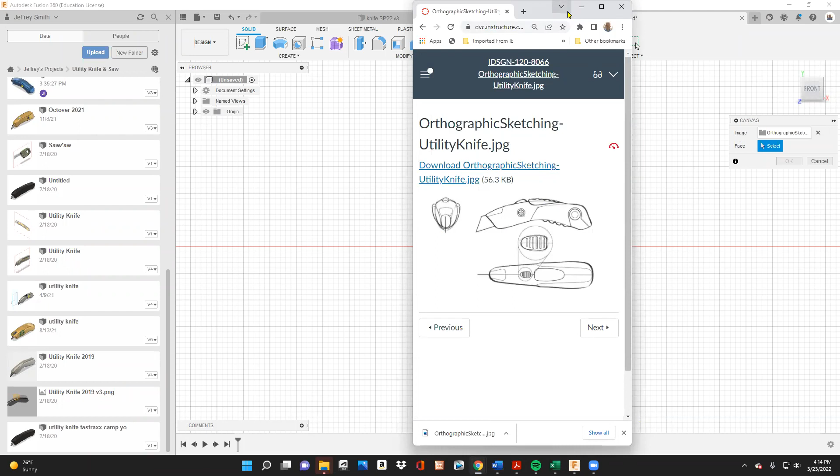Okay, so here we go. I'm going to be bringing in the sketch from Canvas, and I'm going to be bringing in my orthographic drawing. And so that is going to be this item right here. And so I've opened up Canvas, and so I am at the home menu here, at the home in 3D, and I'm gonna click on my front view.

And so what I need to do is bring in my sketch. And so the way that I do that is I go to Insert and I go to Canvas. And so insert from my computer, it's in my downloads, open. And so what it wants to know is where you're going to put this, right? And so this is going to be on this plane right here. And that's my front view. And I'll just say, for now, I'll put OK.

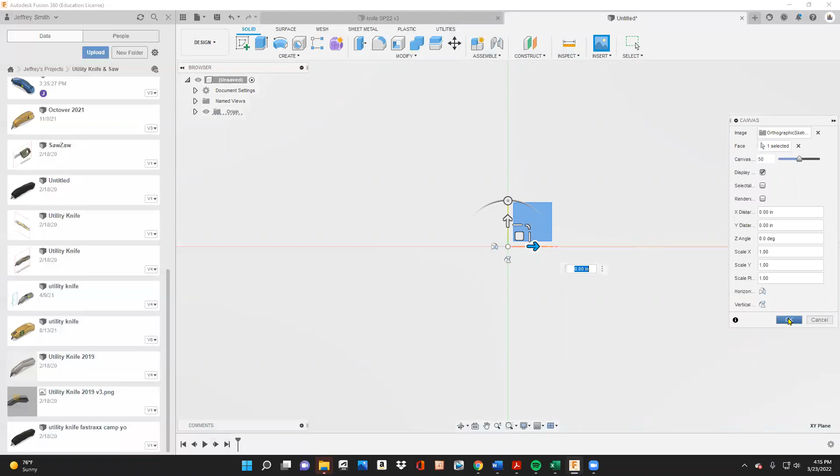All right. So let's see what happened here. Apologize for the little delay in all this. All right. So let's kind of come back to my home menu. All right. So there it is. There is my sketch right there. And I put it on the front view.

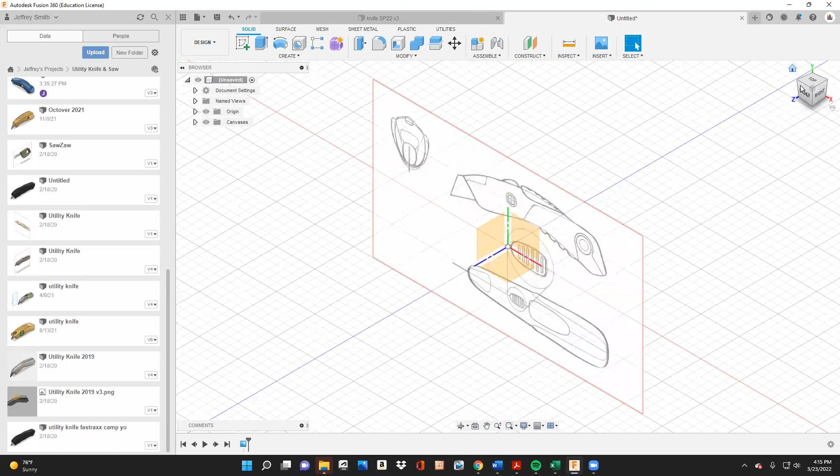So I want to model this view, and I also want to model the top view kind of all at the same time. So what's going to happen here is before I proceed much further, what I need to do is I need to scale this, right? So we have no idea the scale. In my drawing, I said, okay, I want this to be about 6 inches.

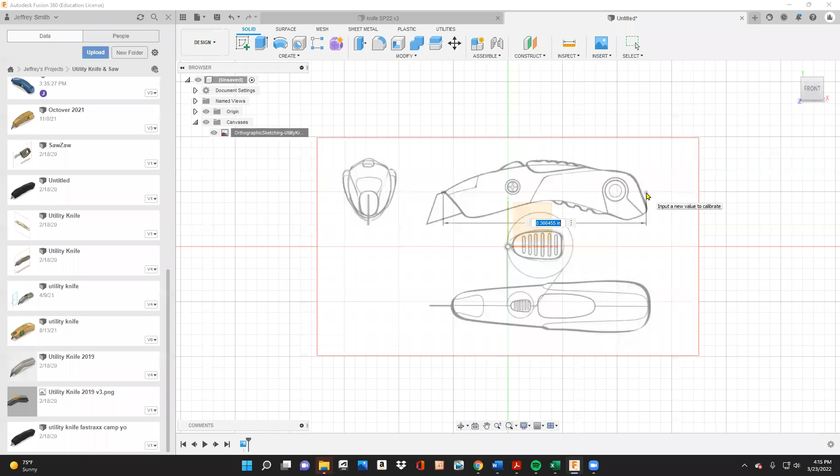So I'm going to go here to my canvas and I'm going to say calibrate. And so it's actually really easy to use. I just click on what I want the size to be. So I want that to be 6 inches. All right. So I just type in 6 and I scroll out and it's at 6 inches. Now I want to make sure that I'm in inches, and I am. If I'm not, I just click and I can make it something else.

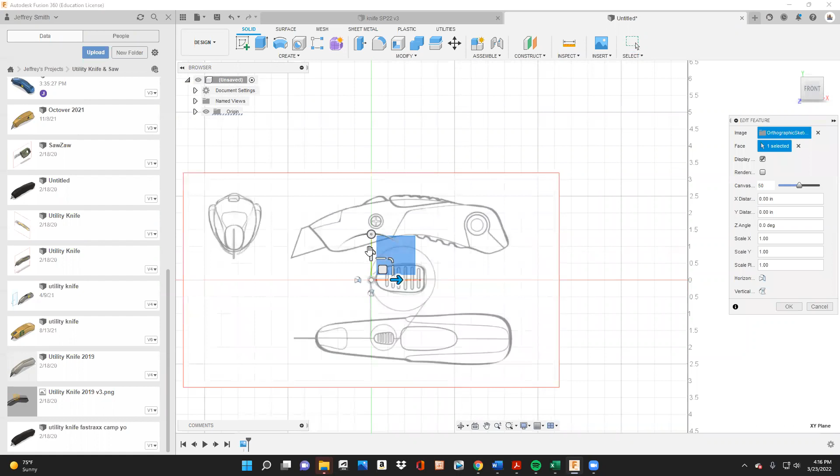And then what I'm going to do is I'm going to move this. So I'll go right click and I should just be able to move it by right clicking it. I can go edit feature and I can just move this. And I'm kind of making this my X and Y plane, and I'm just putting it there. It'll be easier to do it that way. Okay, so that's cool. All right.

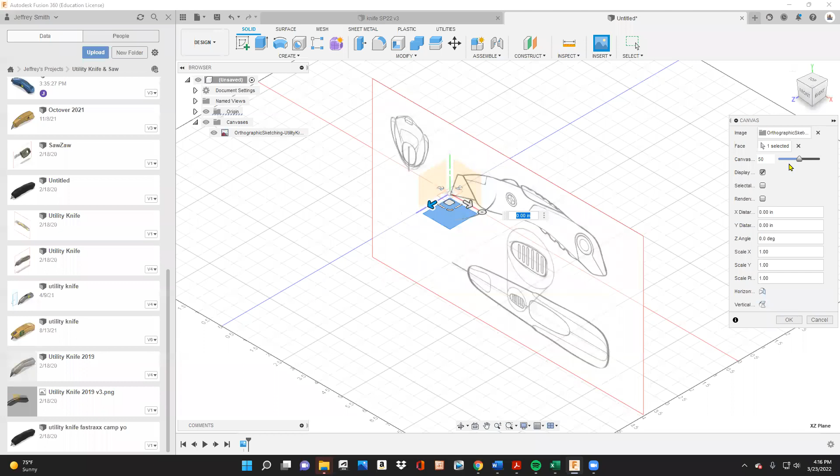Now I'm going to do the same thing for the top view. So let's go. Here's my home view, and I'll do exactly what I did before. Insert canvas, and I'll select the same object, my sketch. Okay. And this time I want to put it on my top view. So I'm going to click this, that right there. And hold on, please. Okay. And so there it is. And I'll say, okay. And I'll do the exact same thing I did before.

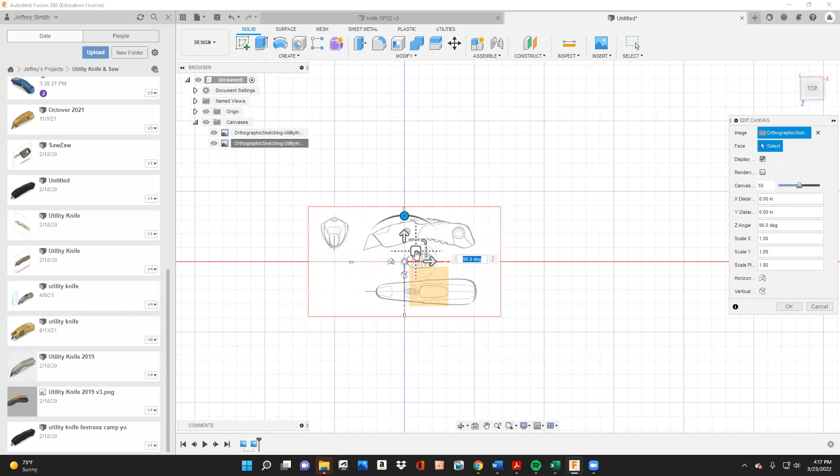Now you'll notice it's really small. That's okay. So I can right click on it either on the bottom or here. And I say edit canvas, and I can rotate it. And then let's move. I'm working on the top here. So I'm actually going to put it right in the center because when I model this thing, I can make it so it goes both ways. All right. So there it is. And I'm going to say, that's great.

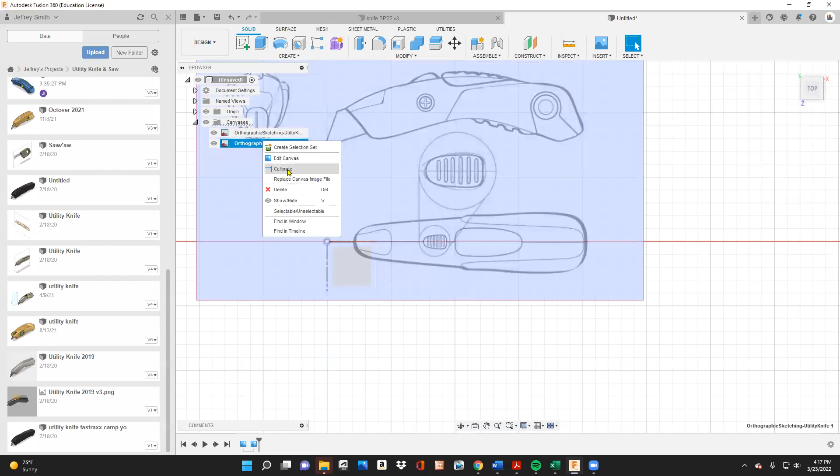Now I need to scale it. So right click here, calibrate. And I said, this is going to be 6 inches, 6. All right, scroll out with my mouse. I need to move it. I probably should have calibrated afterwards. Edit canvas. I'm just going to move it so it's right in the middle. All right. So there it is. And I'll say, okay. So I've got this drawing in there.

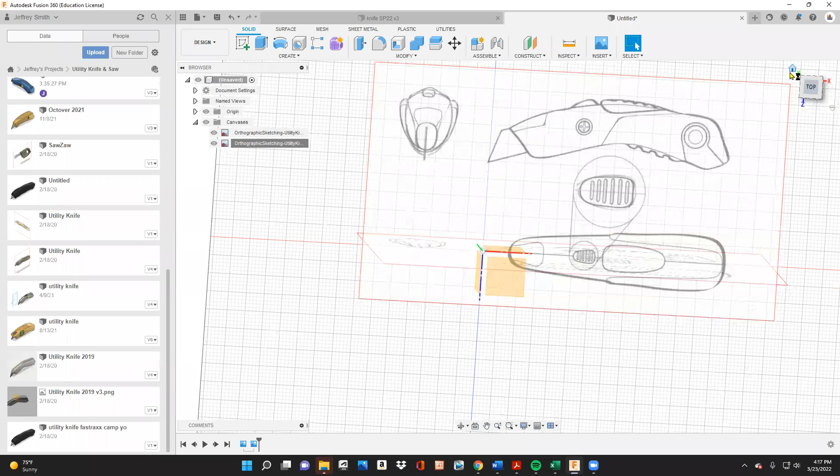Right. Might look a little confusing. I could turn the top one off if I wanted to. So we're just going to now work on this thing. And so it's actually really cool the way this works. So I'm in design. Before, we used to make objects and extrude them, but you'll notice that there's this create form on the top, and I can just click on it,

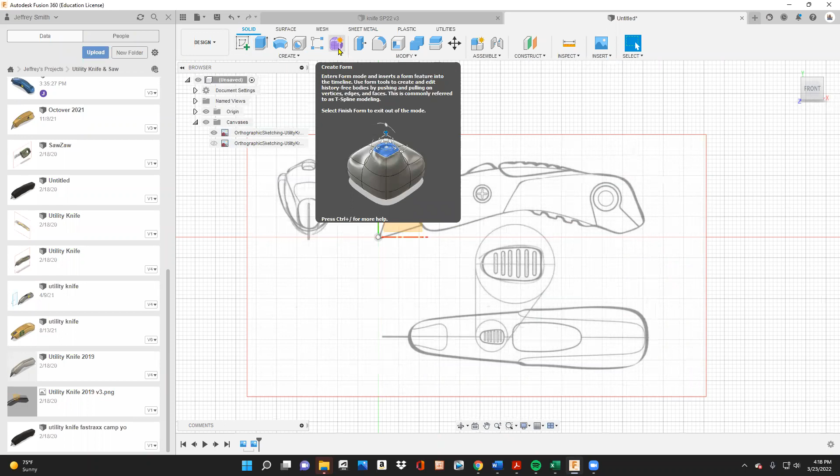and it wants to know, all right, so where do you want to put it? So I've got this origin highlighted, right? So it's on, and I'm just going to click that orange thing, and then I'm going to select this box form. And so if you look on the right, it says 2-point or center. I'll go 2-point, and I'm just going to click one corner of it and click on about the other corner here.

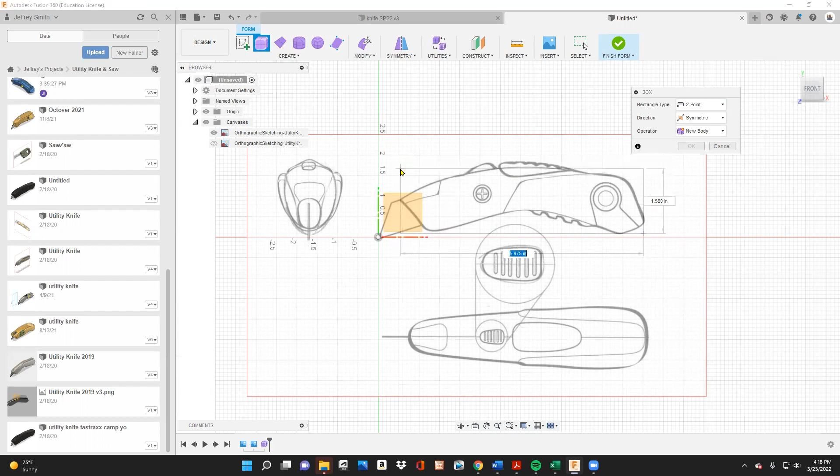All right. And so there's this shape that it gives me. It's like this little blob, but I can very easily work with it. So a couple things I'm going to do. I want to mirror this. And what that means is when I work on the left side, it's going to work on the right side. So imagine a car. If you were sculpting the left side of the car, you'd want the right side to be the same. So what I do is in this box here, I click mirror.

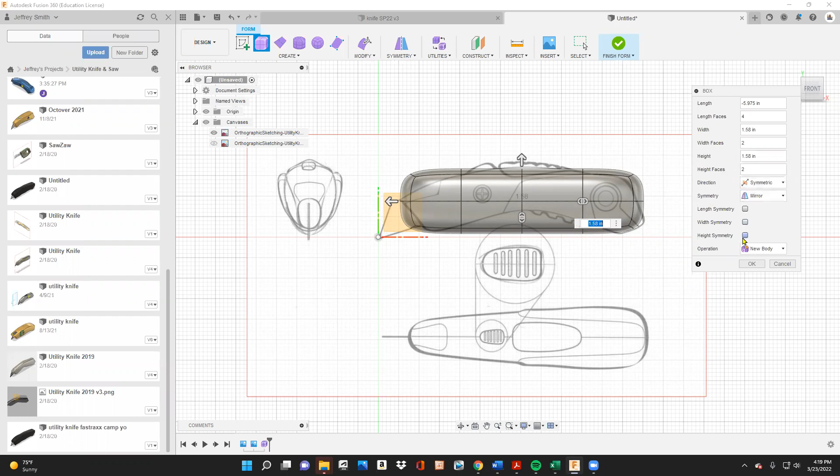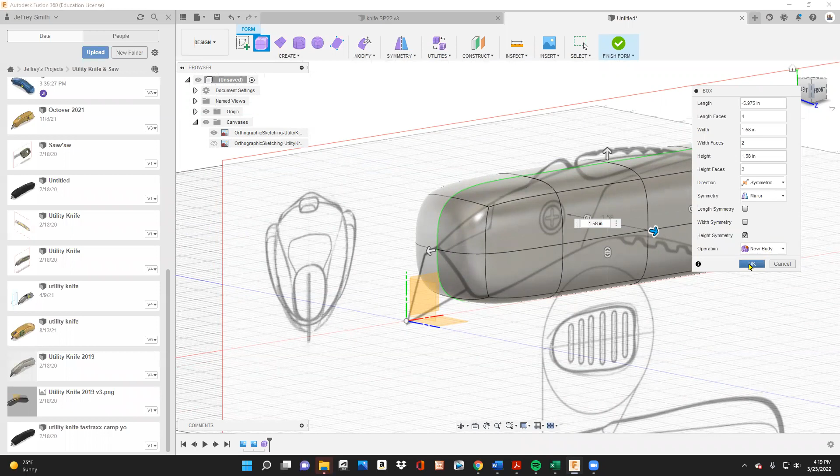And then if you just click on this, you'll see this green line. Length, I don't want the left and right, so I don't want that one. I don't want the width, which is essentially top and bottom. So what I want is this height. And so you'll see there's a green line running through this thing. All right. And so it's a new body, and I'll say okay. And so there it is.

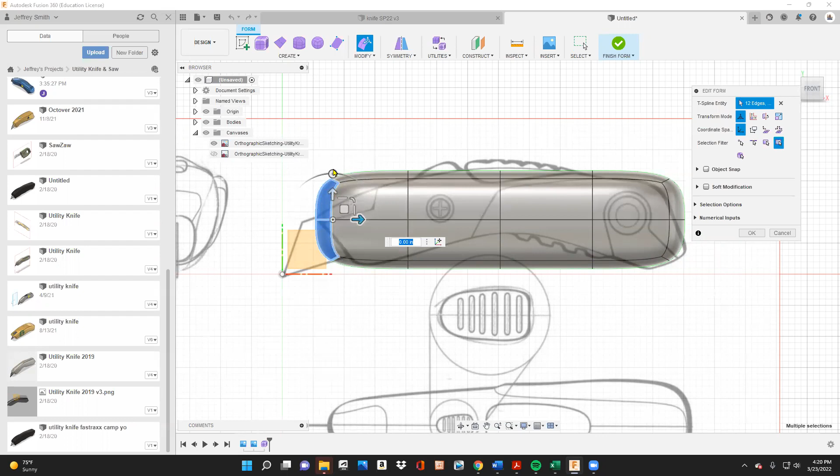And so all I'm going to do now is take this shape, and I can do all sorts of really cool things. So I'm going to take this shape and just edit it, right click and edit it, and watch what I can do very easily. I can just start to manipulate it. I can rotate it around. You just have to be careful that you don't fold it into itself. Otherwise, it'll give you a weird error message.

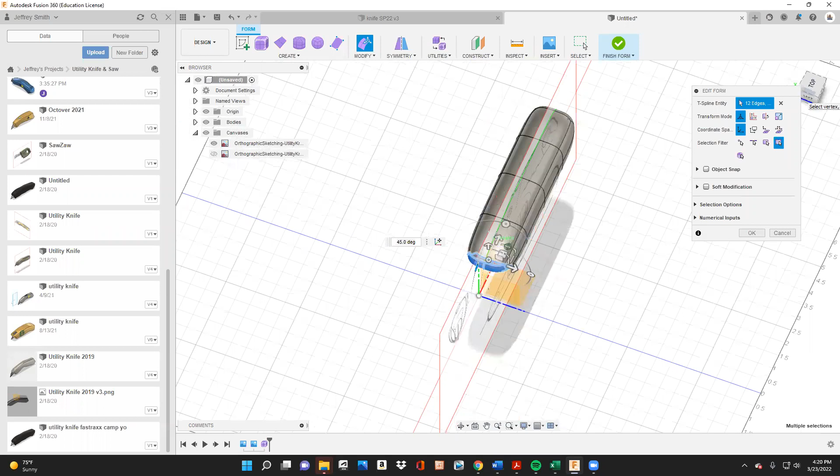So I folded that. So now what's happening, if you look at it in 3D, is whatever I do on that side is happening on the other side at the same time. And so that's pretty cool, right? And really what we're doing today is just kind of cleaning this up. And so I'm going to show you a couple features here. Now I can go to the back here and do the same kind of thing. You're going to notice that it doesn't all line up.

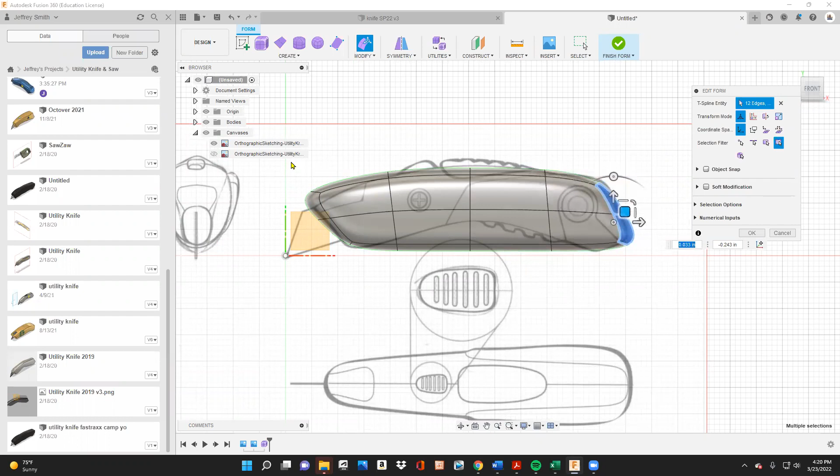The same way that I moved the object, I can just move the object. This top, if you look through it, you can see where it needs to come down. So I grab this, and just kind of like clay, you can manipulate it. I'm not going to worry about all these sharp edges. We can make that happen very easily. But for this exercise, we're just going to make a basic shape. So I'm just clicking this thing and moving it up and around.

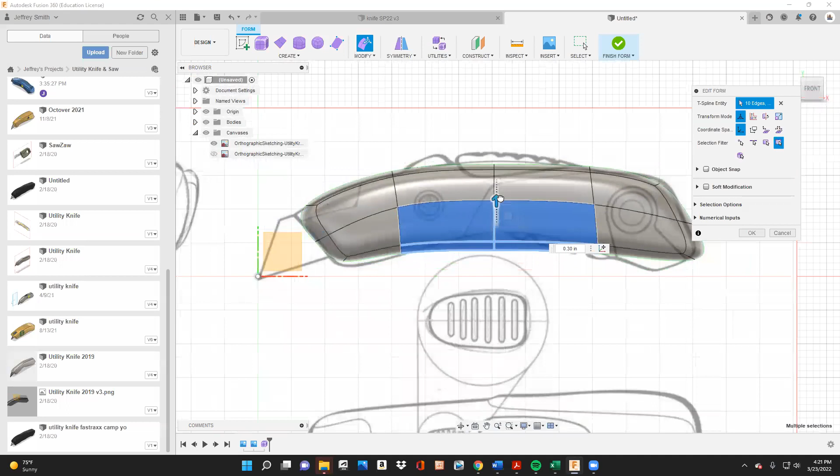Now you're going to see, here's a problem, right? Because if I pull this up, then all the other part is leaving. So something that you would do for that is create more splines. And the way you do that is you basically just double click this line, and you can either right click or generally go to modify up here. Double click here and say modify, and I'm going to insert what's called an edge, and I can move it to one side or the other or both. So I'm going to move it right there. I'm going to say okay.

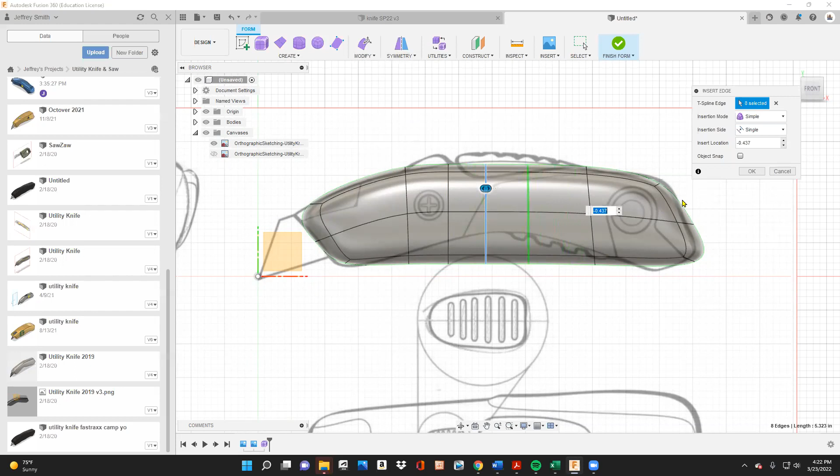And then now when I bring this up, I'll have a little bit more control. So at the same time, let's do the other side here. So I'll say modify, insert edge, and I'll bring it out this way. And I'll say okay. And so now I can start to grab this, right click and say edit form, and I can just move things up, and it's a little bit better. So honestly, that's about the extent. You can play around with this more.

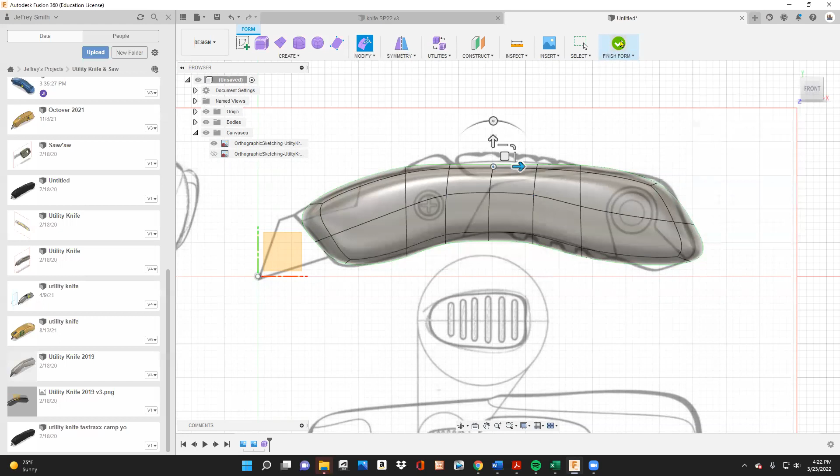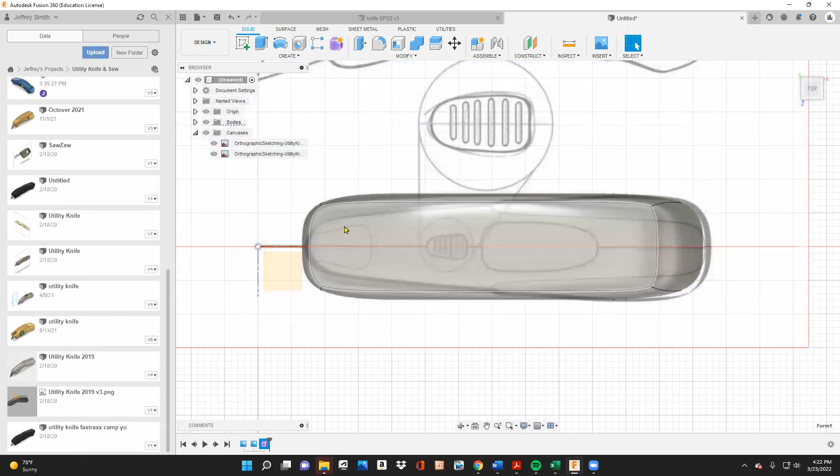And so what I might also do on this is, I could finish this form and say, oh, that's pretty cool, right? But if I wanted to also do the top view, I could click on the top button here, and then I would turn on my top sketch. And be like, uh-oh, it's skinnier up front. So what I would do here then is go back. This is kind of like this timeline down here. I could either right click on here, or you can do it on the object, but I'm going to right click and say edit.

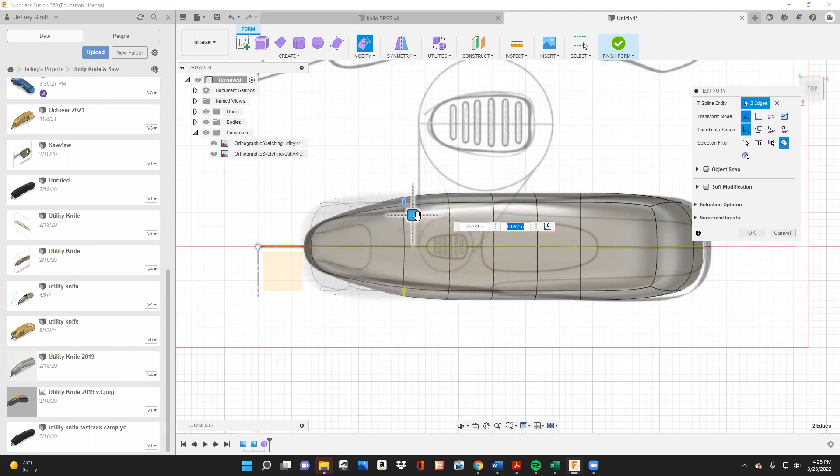And so what I want to do is maybe move these points in a little bit. So edit form, and I could just kind of move these things in. And again, you just got to be careful that you don't fold it into itself. If it folds, it'll give you an error message. And so you just kind of play around with it, making something that you like.

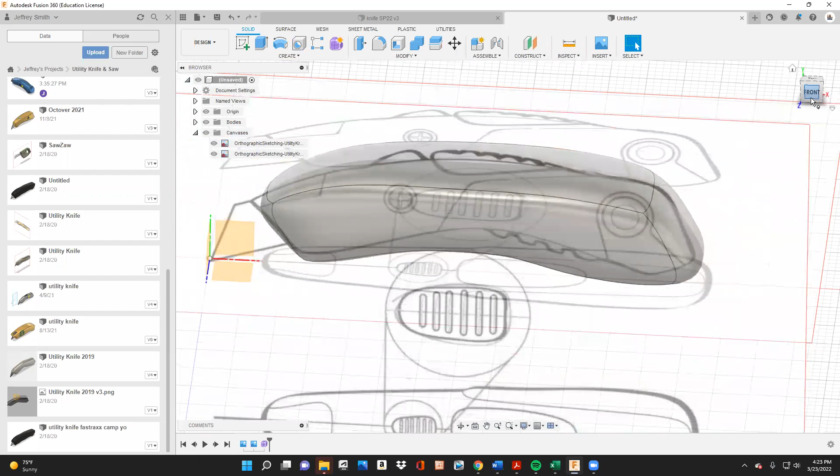And really that's the extent of this part of it, right? So this is where you can have a lot of fun designing. And this is why it's important that you draw your concept first, because you can get very lost in this software, and if you're trying to design the objects, it can get really confusing. So I'm going to turn these off. And so there's the basic shape of it for what we're doing right now.

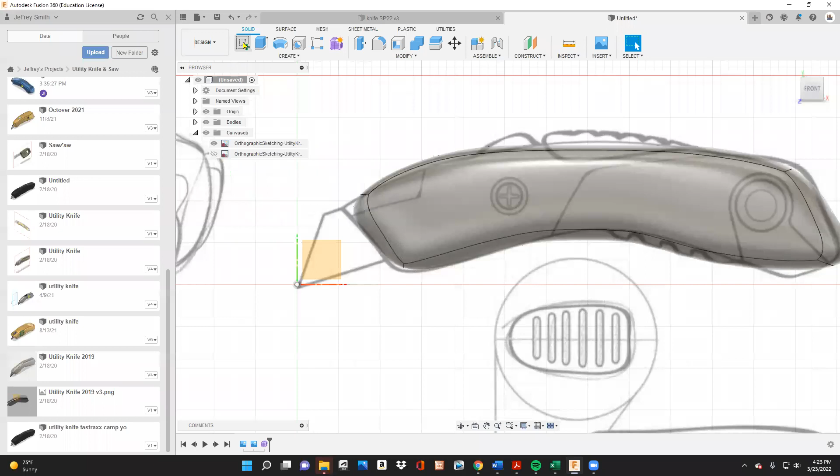I think the last thing I'll do here is put this utility blade in here. And so the blade would go kind of like what we were doing initially with these lines. I click here, click on where I want to put it on the front view. And then I'm just going to click this line tool, and I'll start maybe here, come down. And so utility blades actually look kind of like this. And it doesn't really have to be all that perfect.

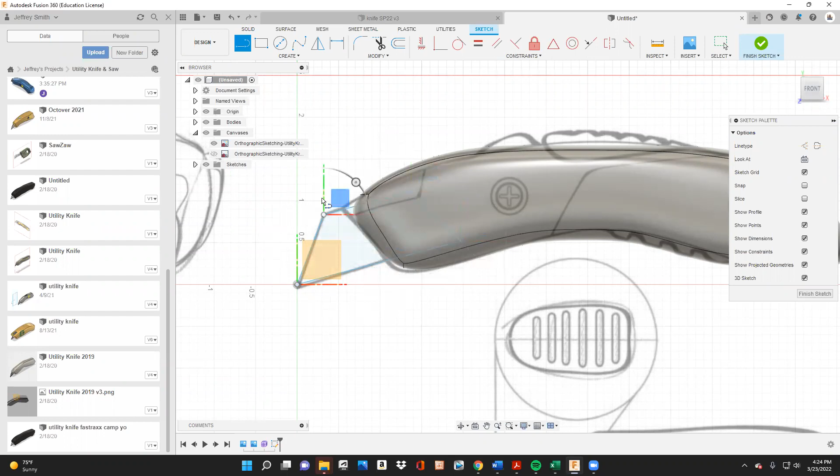And then I want to finish the sketch. And then I'm going to extrude this thing, because right now it's just lines. So the cool thing is because I put the thing in the center, it's right in the center of the object. So now, just like you would extrude legs, I'm going to just extrude it. But the only difference is I'm going to have it go two-sided. All right. And I want to make sure it's a new body.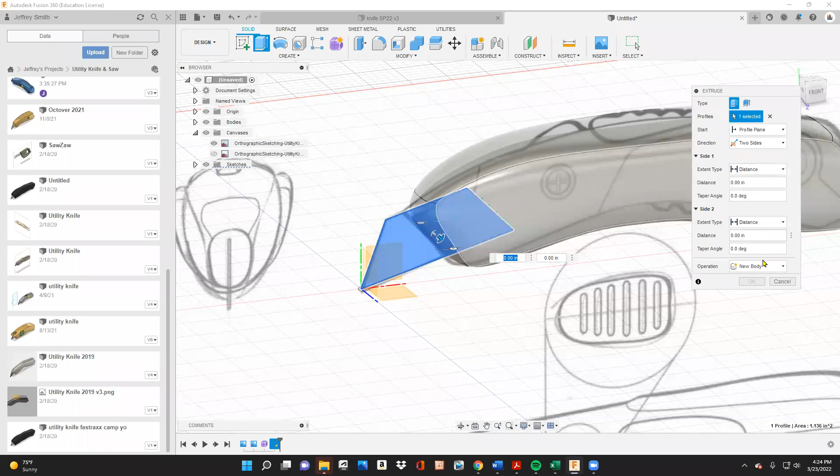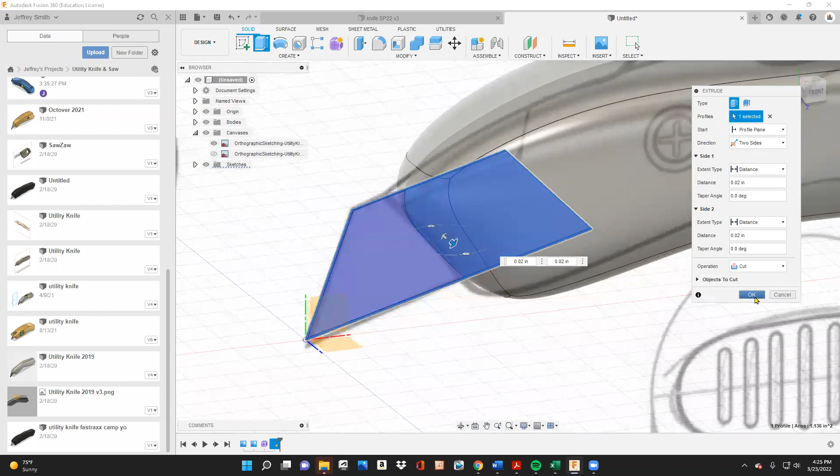And I could just grab it if I want. Or that's a little thick for a utility blade, maybe 0.02. And so I'm not going to worry about the taper or anything today. So 0.02 going both ways, and then just say okay. Oh, you know what I did? What I did was I did subtract. I didn't look very carefully. I actually cut out that little groove in there, which is fine.

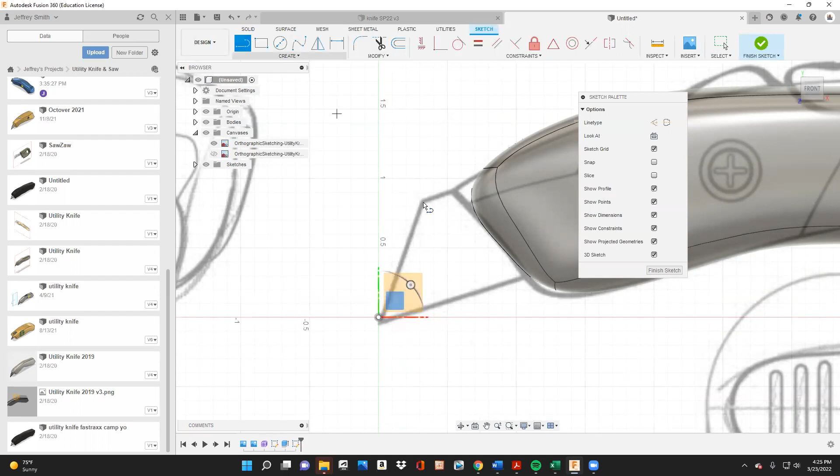So this time let's actually make sure it's on new body. What I just did is we cut out a hole. We don't want to do that. So let's go ahead and do the same thing. So I'll just go ahead and make my utility knife blade. I'll be a little bit more careful here. And then I say finish sketch. And then this time I'm going to extrude it like I did last time.

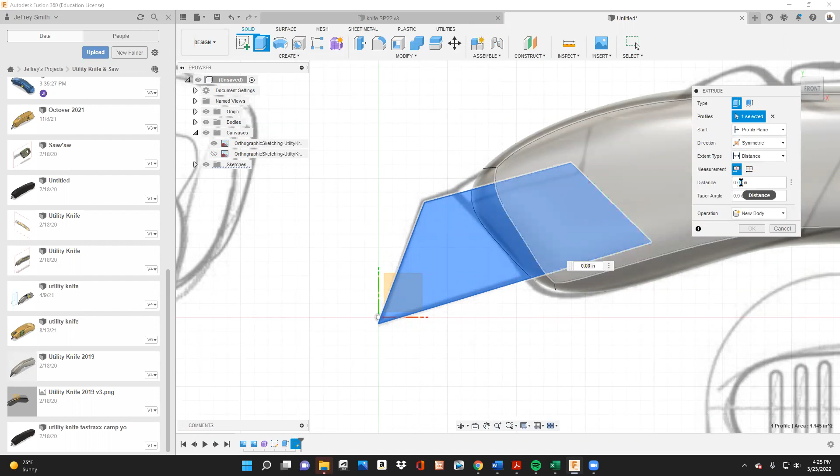We're going to go two-sided, symmetrical. Actually, you want two-sided symmetrical. I'm not sure I did that on the last one. And the distance is going to be like 0.02. And I can look at this as I'm doing it. And then make sure it's not cut, like last time. We want to just say new body. And then I say okay. All right. And so I've created this new body here.

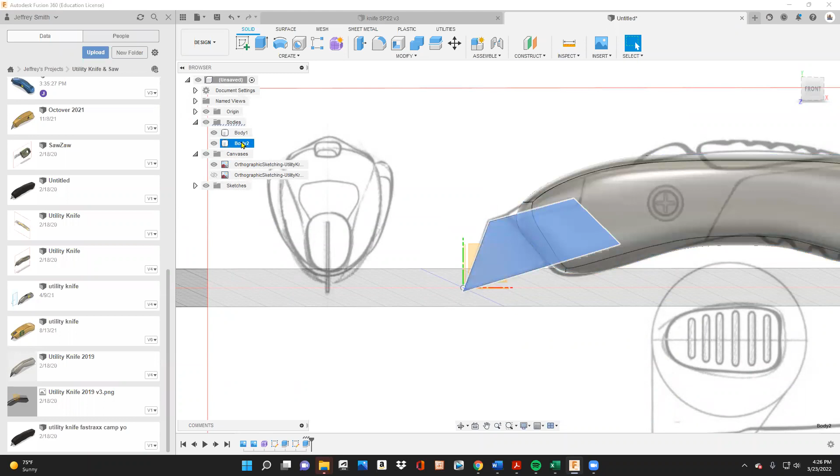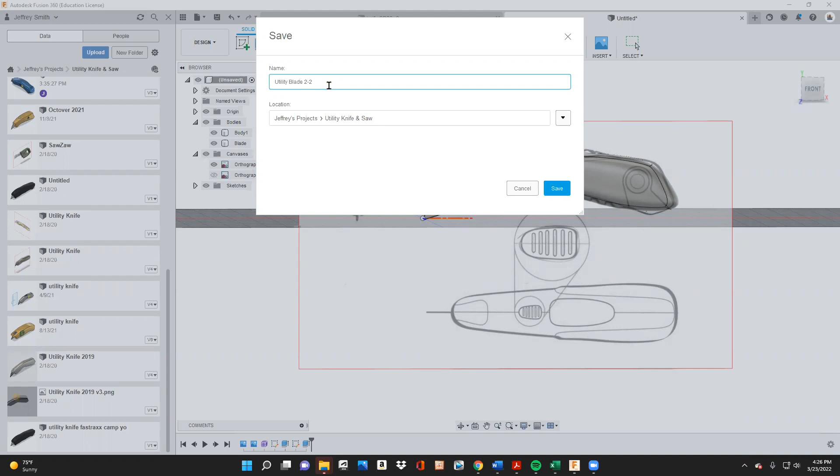So this is the utility knife body, and this I could maybe call blade. All right. So that's pretty cool. So now all I'm going to do is just save it. I'm going to save this as utility blade. And I'm just going to put the date. All right, and I'll say save. And now I'm just going to do a quick rendering, and then I'll basically be done with it.

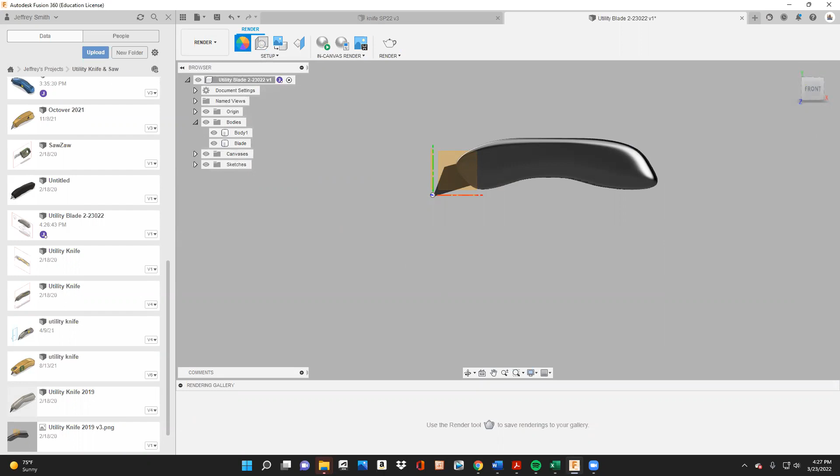So go to design, go to render, and I want to turn this off. I don't need all that. And then just in the top ribbon going from left to right, let's pick the material of this object. Before I do the environment, it's not coming on. Why is it not coming on? Oh, there it is. Okay. So you've got lots of materials to choose from. I don't know if you want to make it liquid or leather, but I'm going to make this aluminum.

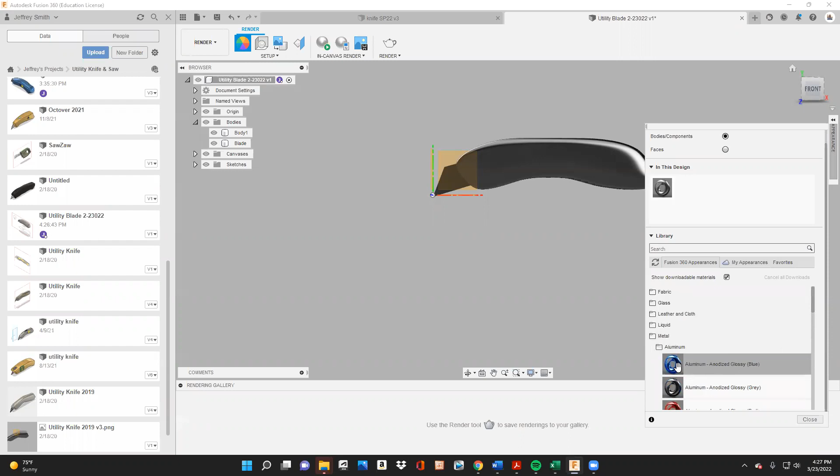So I go metal. Where was that metal? There's all sorts of things. I'm going to just do this blue glossy aluminum. I'll just click on there. And then I could do the blade too. So maybe I'll do the blade. Let's kind of zoom in. I'll select this blade and I'll do the appearance of this, and I'll make this like steel or something.

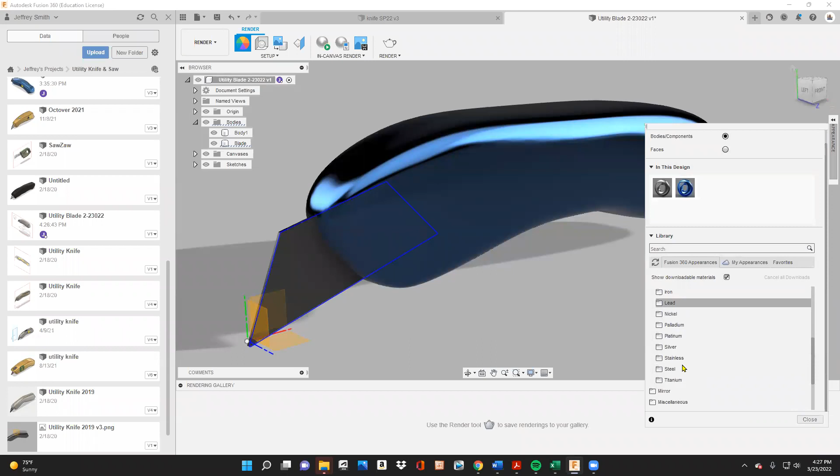So you can play around with steel. All right, maybe something with a finish. And then the last thing I'm going to do before I render this is I'm going to put my logo on it, and you're going to put your logo on it too.

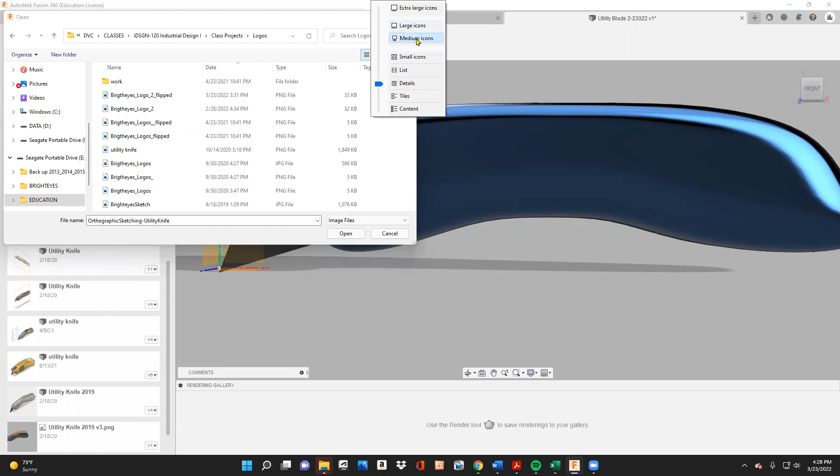So what you do is you basically click this decal. And so I'm going to go from my computer, and let's see, this was in my logo folder. So maybe I should just real quick look at it. Medium icons. I really don't know what the difference between all these are, but let's go ahead. These are all either PNGs or JPEGs. And so I'll select this one.

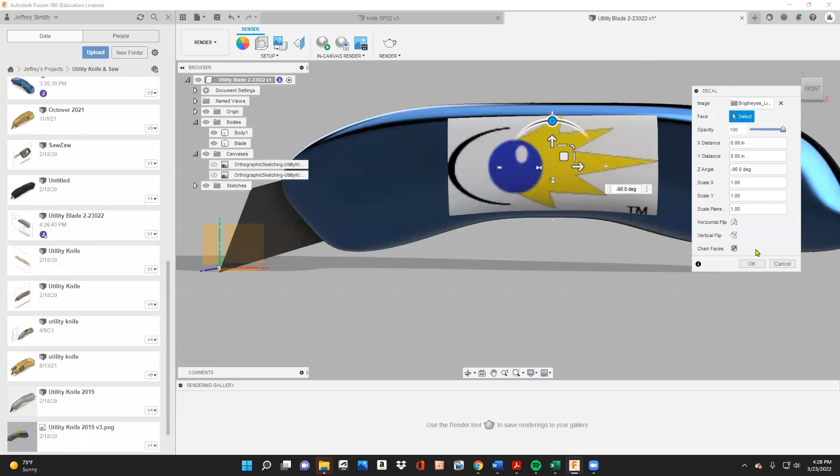And where do you want to put it? I'm going to put it right here. And just like we were doing before, I'll rotate it. Oh, this is a JPEG, so I don't want that because it's got that background. All right, so let's see, canvas. Where did that go? Let's go ahead and cancel that. And let's try that again. And I should this time look a little closer. So that's what happens with a JPEG.

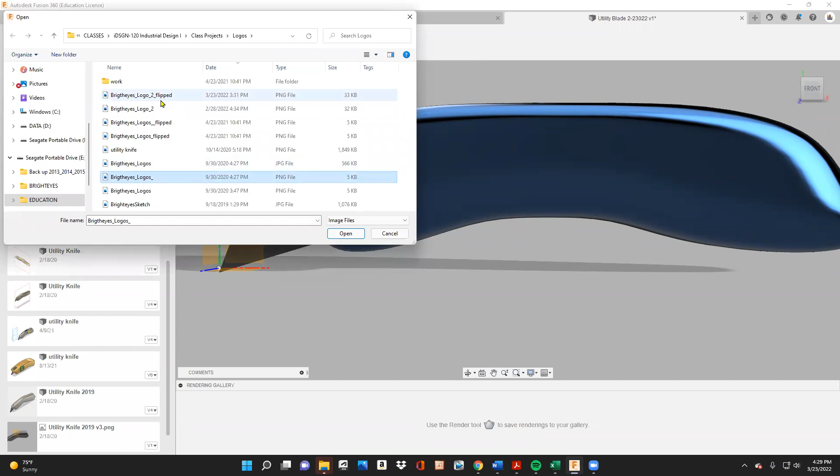And this time I want to make sure I have a PNG, because a PNG hopefully has that transparent background. So when I go to details, I just want a PNG right there. I should probably spend more time with this. There's a PNG. Let's try this one. Okay, select the object and then put it where I want to.

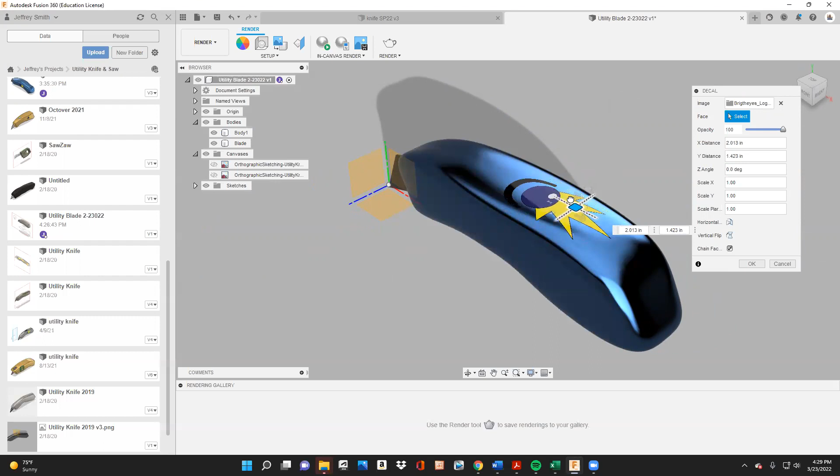There it is. Now this would be a good time for my white logo. You can put this anywhere you want. Actually, if you look at it, it'll wrap around your object, which is pretty cool. So you can put it on the top or the side, wherever you want to put it, right? And then I'll say okay, and then I'll just create a quick little rendering, and that'll be that.

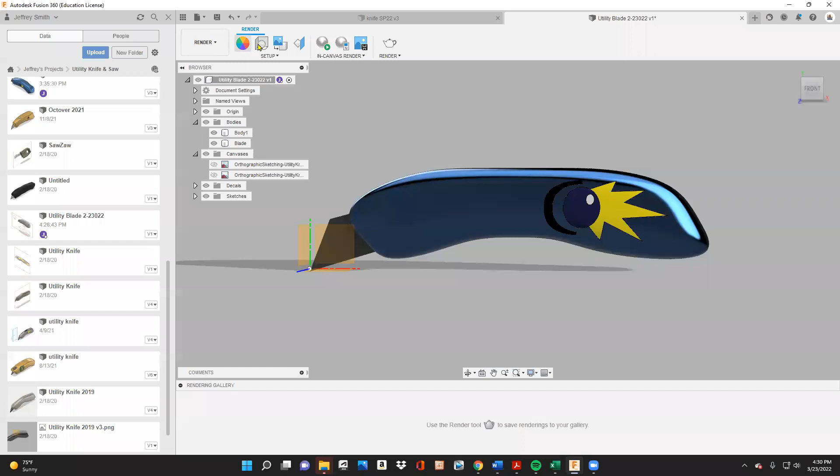So I'll say okay, and obviously you're going to put your logo, not mine, and then we'd go into here, and we would actually go place this in an interior. So you can either do it like this solid color or pick an environment. And then for my environment, you've got to kind of play around with this. I'll just randomly try this sharp highlights one. Let's drag it and drop it in there. I think that's what I need to do.

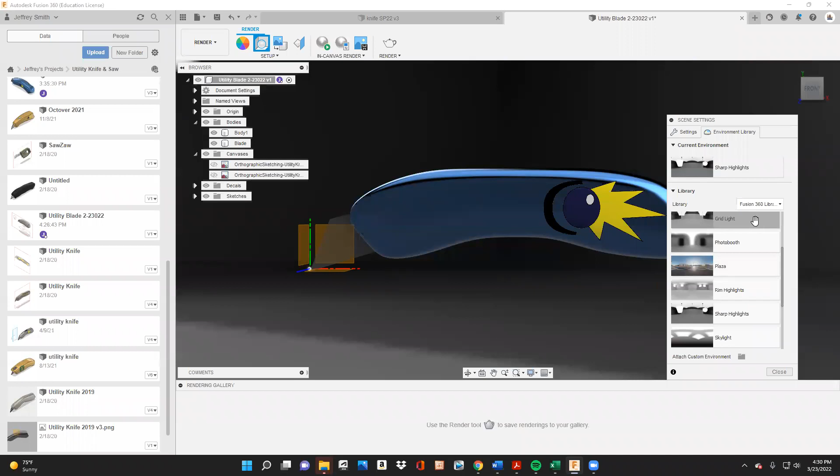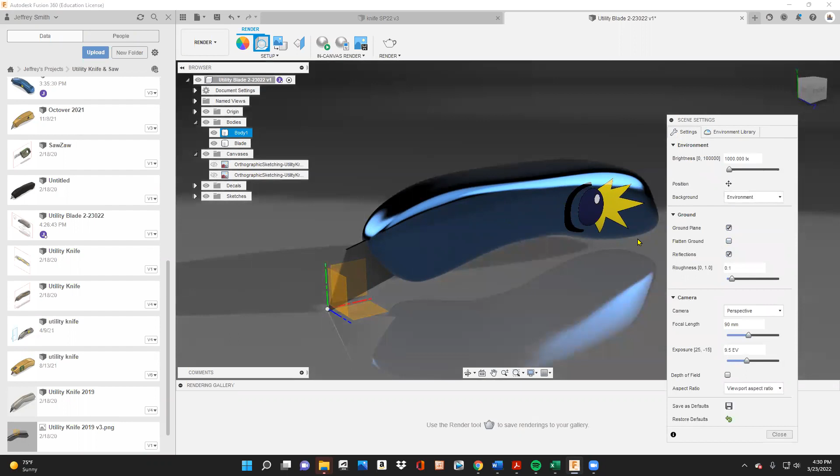And let's get a 3D view of this thing and see what this will look like as a rendering. So I think I'm good. Environment, ground plane, and you just want to play around with this. I could put reflections on it. All right, and then just do a quick little rendering. It feels like it's going to be a little dark, and this is kind of half the fun of it. And then I'll just go ahead and say close,

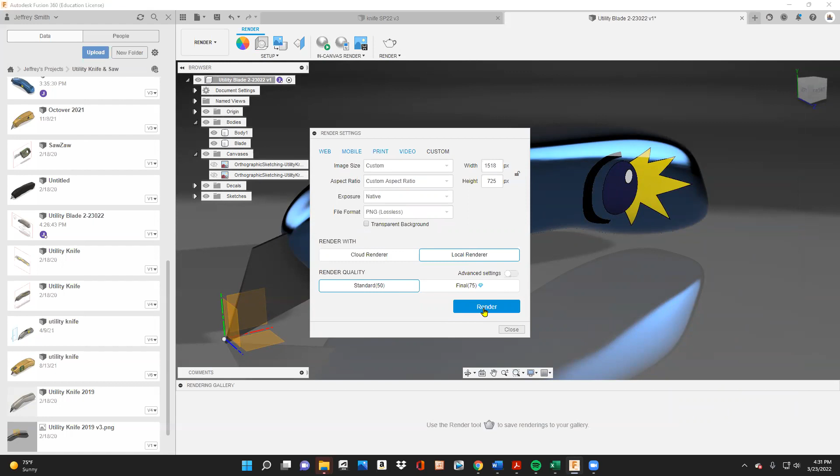and then I'll go to the little teapot here, and I want to make sure that I'm doing a local rendering. I don't need to do a real big one, and it's going to be a PNG, and I'm just going to basically use the default settings here and say render. It usually takes a couple minutes to render, depending on how complex it is and how many light sources. You can add light sources with color. So there's a lot you can do with the rendering and have a lot of fun with it.

You can see I have this reflection, which is kind of cool. And so this is really the first phase of this. In the next tutorial I'll do on this, we'll add some buttons and a little bit more detail. Maybe we'll make this into a blade where it has a sharp point on the bottom, kind of taper it and things like that. All right, so I think it's done. Let's see, there it is.

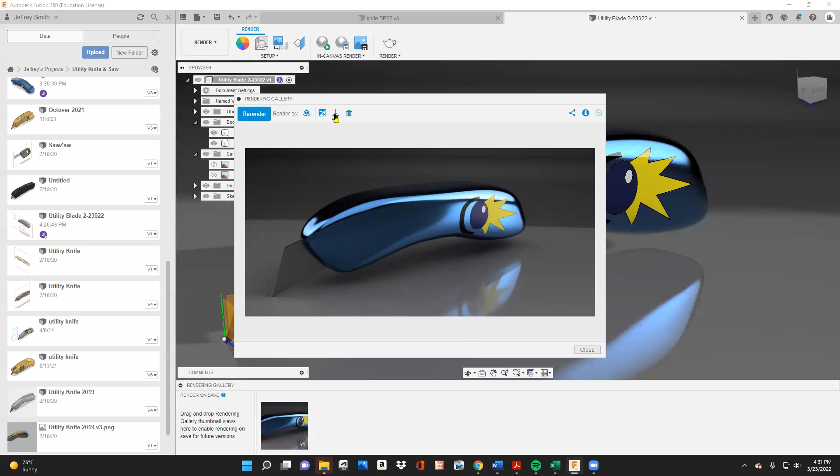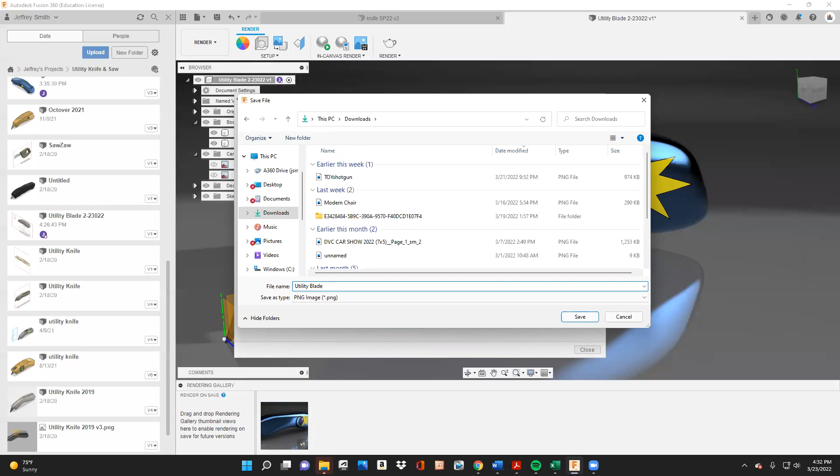It's a little dark, but now I would just download it to where I want. So put it where you want to put it. I'll just put it in my downloads, and then I'll upload this. So this is my utility blade. All right. So really what we're learning today is just how to use the different kinds of modeling techniques, where in the design phase we're just being able to work with this form and manipulate it. So I will post this online for everybody.